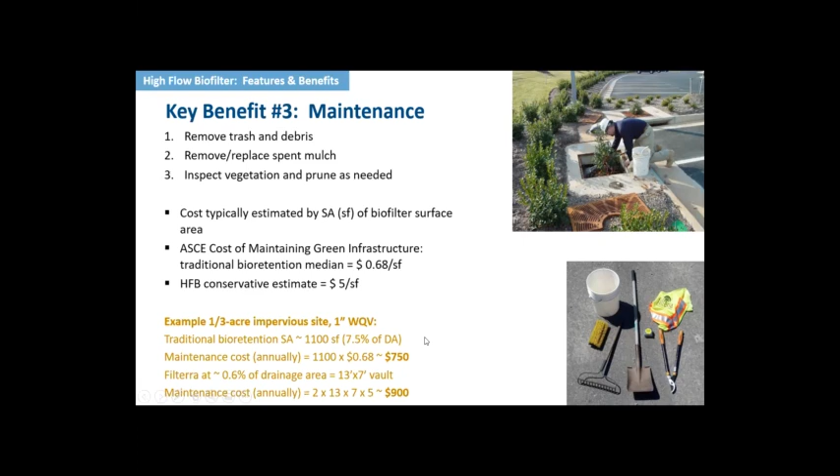So really, when you compare high flow biofilters versus traditional bioretention, some very key conclusions can be drawn. Generally speaking, they have the same components. They have a mulch layer. They have a media that's generally 2 foot, but traditional bioretention can go up to 4 feet, sometimes 5 feet, again, according to jurisdictional requirements. Typically, traditional bioretention is underdrained. With high flow biofilters, they're always underdrained effectively. And then they also have plants in both cases.

And there are some high flow filters that claim to be biofilters that do not have plants, but we would make the argument that plants are very integral and required for the physical, chemical, and biological processes that occur to accomplish the high removal rate that both systems, both the high flow biofilter and a traditional bioretention system get. But conversely, again, the dramatic difference is the flow rate, and I won't belabor that point, but that is something that is key to the design of a high flow biofilter.

The other final thing I would mention is that traditional bioretention media is made in the field, sorry about that, typically made in the field, generally by contractors. Sometimes they use qualified media from other sources. One of the differentiators on some high flow biofilters like Filterra is that the testing done on the proprietary media itself is extensive. In the case of Filterra, we do 25 different tests to make sure that the media will function, and that includes a hydraulic conductivity test or flow rate test, as well as a quick TSS check to make sure that the media will perform as required in the field.

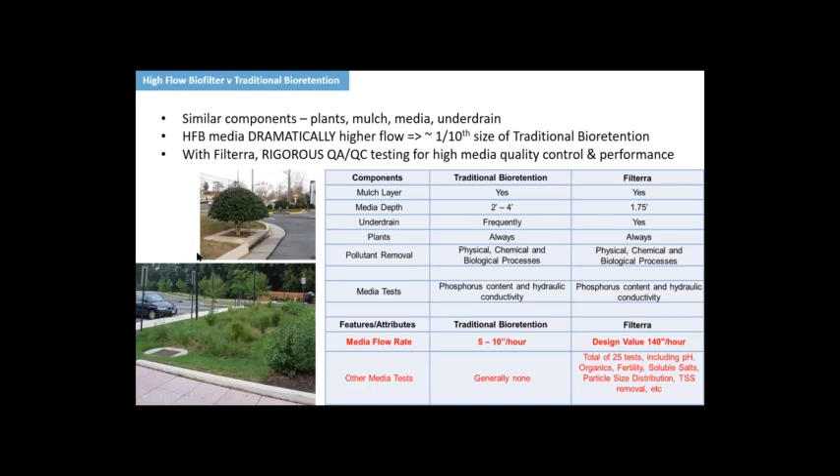The first one is, have you ever looked at using geofibers in your engineered media to artificially increase its internal friction angle to help keep your media from compacting due to water flow? That was the first question. So whoever's asking the question should send us their resume so we can consider them for our product development group. And Yuyu, unless you have any commentary, I have nothing to say relative to that.

It's a very intriguing comment in terms of what they're trying to achieve. I will make the comment that generally speaking, this is one of the reasons why it's good to have a high flow biofilter in a vault, protecting it against compaction, and that's part of the reason for a vault being a good conduit for the system. Secondly, the mulch itself is also protective of the media, keeping it from compacting too much as well. Do you have any further comments on that question? Nope, I think that's a perfectly good answer.

Do you want to cover the others, Charlene? Or the next one is, is this biofilter on the NJCAT list? So yes, absolutely. I have a slide at the very end, at the conclusion slide, but happy to comment. Filterra specifically is NJDEP certified at 80% TSS removal, and by and large, any Tennessee jurisdiction that accepts NJDEP certification thereby effectively allows Filterra for 80% TSS by default.

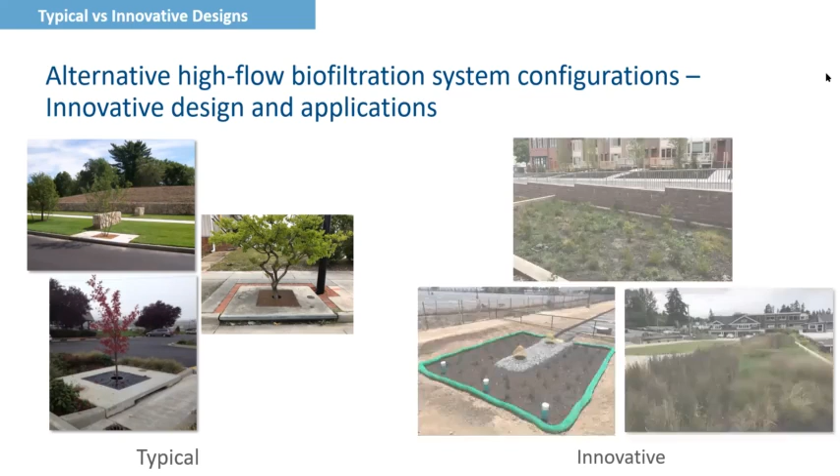From a design perspective, they're flow through systems. So anything that enters the unit itself is going to exit, as it is housed in a precast vault. But over the years, there's been advancements with high flow biofilter designs where there's a lot more flexibility with the shape, the size, and the configurations that you can see on the pictures there on the right. And you'll notice that they very much mimic a traditional bioretention system or rain garden system, as they can be designed without the vault, so what we would consider an open design.

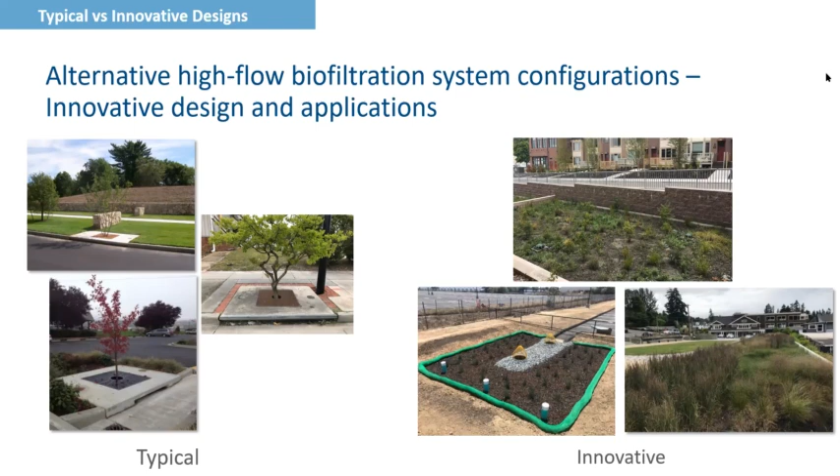And this expands the possibilities of high flow bioretention and provides more opportunity with really integrating high flow biofiltration systems to a project site. And I mentioned design with vaults or without vaults, or vault free options. Typically, if you have it in a vault, they're limited to maybe a single plant or 2 plants at best. But without the vault, you have unlimited range there. You have a multitude of plants that you can use of the same type or different types, native plants, so on and so forth. So there's a lot greater flexibility there.

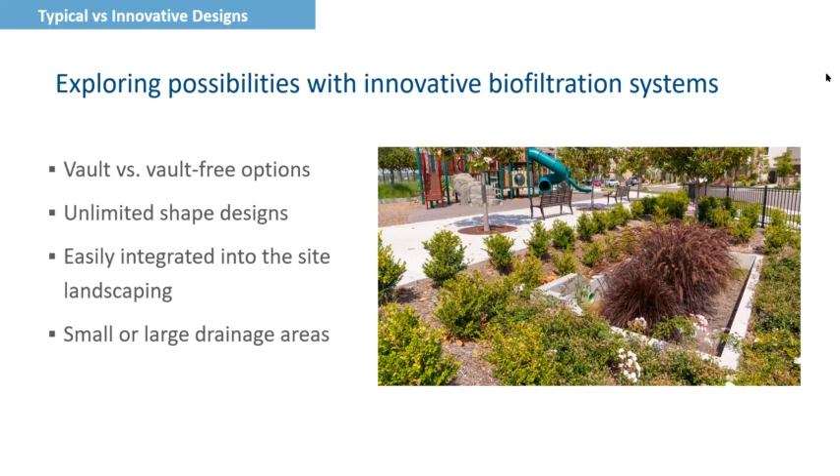And the same can be said about the shape. Obviously, with a vault, typically they're in a rectangular design or square design. With this, not being limited to 1 or 2 shapes, you can really get as creative as you'd like here. And whether it's treating a small site or a large site, it provides a more seamless transition and a connection into the landscape of the native areas of your project site. So this provides a lot more aesthetic value as well, in addition to the water quality benefits.

So really the purpose of these innovative designs has been to build on the proven track record of high flow biofilter systems in typical designs that we have had for over 25 years. And with these additional benefits that are shown on the list here, in most cases, the primary pollutant, especially here in the state of Tennessee, we look at TSS, but we can look beyond that. We can look at pollutants not just limited to that, but some of the nutrients and the metals that Glenn mentioned earlier: nitrogen, phosphorus, metals such as copper, zinc, lead, so on and so forth.

And then providing those removals at a degree that is actually above typical requirements. So for example, 80% TSS is a common number that we see across the country that is mostly implemented, but maybe with a biofiltration system, you can get 85% TSS instead of 80. So you go above and beyond what is required. So there's nothing wrong with that.

In addition, these open designs are configured so that they can provide a little flow attenuation as well as runoff reduction or infiltration, which is really the core part of low impact development. And in addition to that, the improved aesthetics with the plant flexibility, what you can choose to fit. So in many cases, you can get a landscape architect involved with the design of these engineered systems as well. So with all of the above, really looking not just from a quality perspective with typical systems, but also adding that quantity element as well. So really a total stormwater treatment package design with these innovative systems.

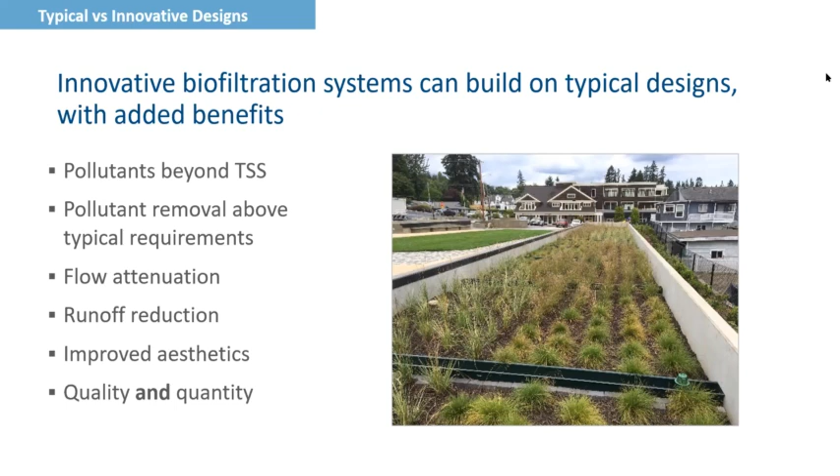So at this point I'm going to get into a couple of the case studies. So I have three. The first one here is actually in my home state in Maryland. This is called the Glenmont Forest Green Street Project. This is in Montgomery County, which is a suburb of DC. It's just north of our nation's capital here.

And this is actually part of a culmination of a countywide green streets initiative that began just a little less than a decade ago. And you'll see the image on the right. There's a bunch of areas in which these green street projects have been completed anywhere between 2012 and 2015. And you see the one circled in red, the Glenmont Forest. This is the one that is currently in design, and it has a projected completion date of 2022. So a little less than 2 years.

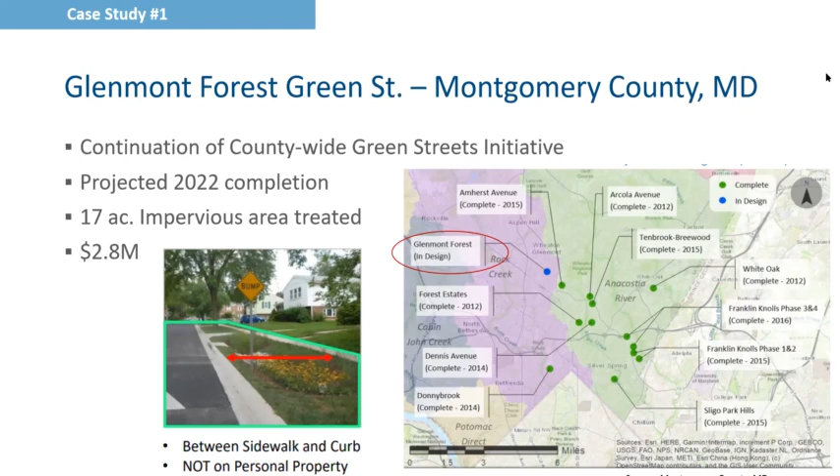And this is treating about 17 total acres of impervious area with a total project value of $2.8 million. And ultimately, the goal of these projects is to really reduce stormwater pollution. So with green streets, actually, I'm going to skip one slide and go to this first, if you excuse me on that. This is an overall map of the project. This is taken straight off of the Montgomery County website.

And this is key to note, because while this project has an overall contributing drainage area of 17 acres, this project focuses on retrofits of county-owned right-of-way, so not necessarily personal property. And this is really crucial in keeping the project within its timeline, and also additional capital economic benefits as well, in terms of the county not having to purchase any additional right-of-way to complete the project.

You'll notice that there is a whole bunch of these. There are 3 types of green infrastructure BMPs that are being utilized for this project. One being bioretention systems, another being rain gardens, and the third being a tree box, which we have been referring to as high flow biofilters. So I'm going to go back to the previous slide.

So these are actually snippets of these BMPs that have been installed in the other countywide Green Street projects. So you saw a list of maybe 10 to 15 that were already complete. These are some of the images there. So you'll notice that it's a combination, it's a hybrid approach. Each right-of-way has different design parameters. So there are fits for each of them.

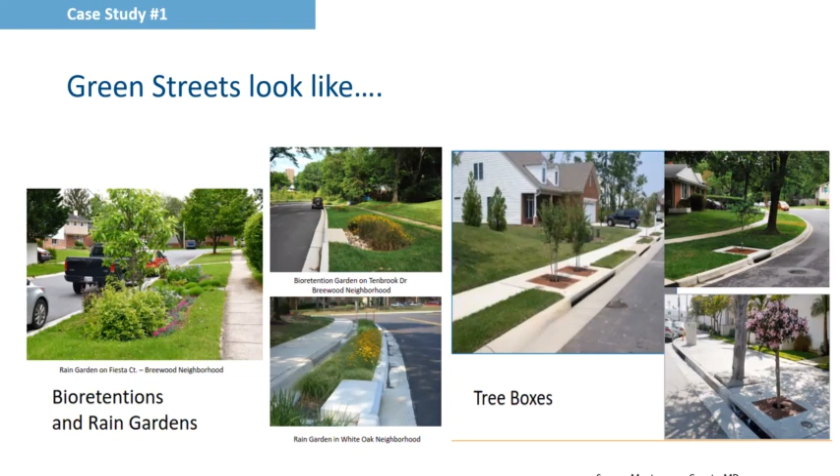So just talking about why green streets. Obviously, there is the stormwater management from a quantity and quality treatment aspect of it. But not just that benefit, but the social and educational benefit as well. So by having these green streets, you are also providing natural habitat for native plants and native animals as well, as we're really finding that communities are often looking for ways to

improve the local economy and community character, from a connectivity standpoint with the neighborhood where these BMPs are being implemented. So by installing these green streets, communities can really achieve not just water quality benefits, but that real connection, that real vibe with the neighborhood, that communal feel. They feel part of these infrastructure projects, all while promoting a healthy environmental area and creating a safe space for the residents that live in the community.

So this is the second case study. So we're going to go all the way out to the West Coast here. Glenn mentioned Washington a couple times. This is right in the Puget Sound, where it ultimately discharges to Puget Sound up in Kitsap County. This is called Whispering Firs Stormwater Park. So the image that you see on the left, this is an overall snapshot of the facility.

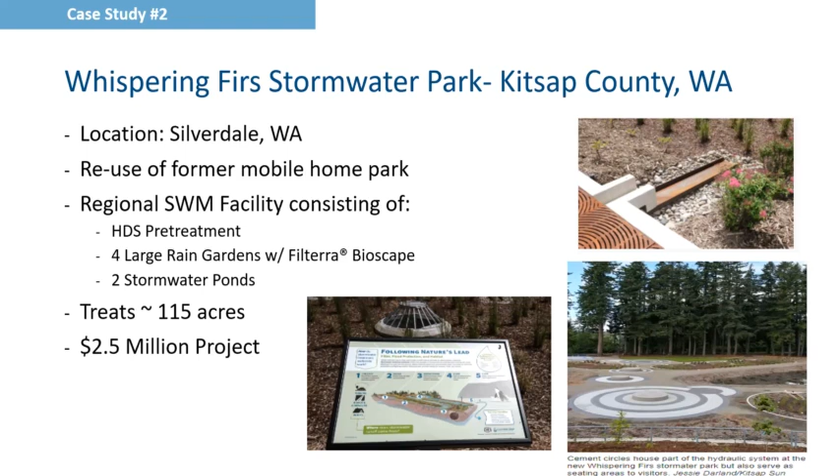This is from 2019, so this is about a year ago. So you'll see, I'm going to go back one slide, that a lot of the plants are still kind of in their infancy. So I think it'll be really interesting to see them mature and grow over time and really start to look like a very colorful and very pretty, aesthetically pleasing rain garden in the near future.

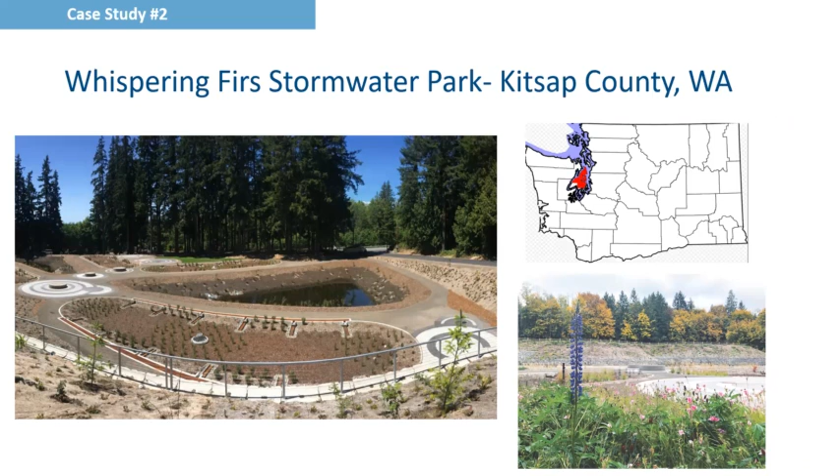This one, compared to the previous project that I highlighted, captures even more drainage area. This treats up to 756 acres of contributing drainage area. So that is a massive amount of runoff that is entering, and a massive amount of runoff that was previously untreated. So it's kind of staggering to really think about these things and think about what these potential large-scale regional stormwater facilities can really do for the community.

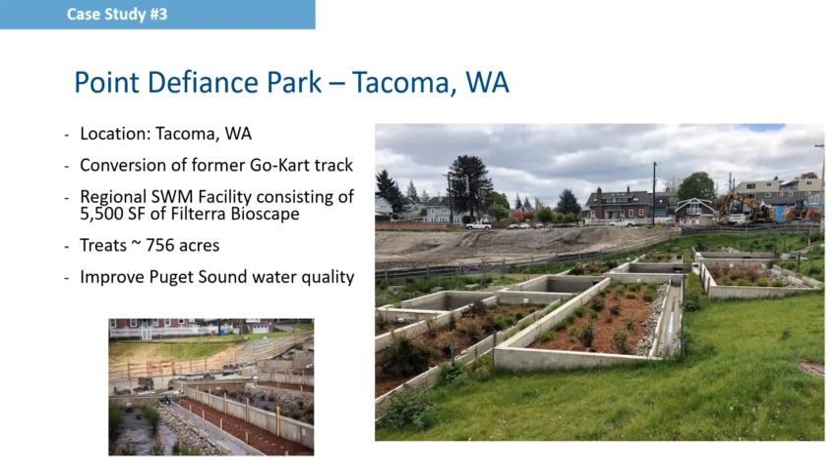And another fun fact for this one, this was actually a conversion of a former go-kart track, and there were some real steep slope issues where this project was going to be located. So what they did was just kind of mimic a waterfall, like a step down approach. So you'll see that it kind of flows in from the right side here, from all the way up to the top, and then through various diversion channels and flumes and swales and such, it kind of naturally steps down and provides treatment of the whole drainage area. There's a huge end wall that you can't see here in the picture that is the inlet into this facility. So that was a really interesting fact about this one.

And I think I'm mentioning all these case studies because traditionally we think about high flow biofilters as just, okay, let's achieve stormwater quality treatment. And I think that is first and foremost the purpose of these facilities. But by going with these innovative routes where you can capture a lot more drainage area and you can go outside the realms of just having it in a small precast vault, by implementing these large facilities, it creates a lot of opportunities as social tools, community tools, recreational environments where you're providing more awareness to the community of what stormwater management is really all about, especially in an area where they hadn't really implemented anything of the sort.

And downstream, especially in these areas, Glenn mentioned salmon, that it's a huge haven for this area. So it doesn't just contribute to, say, drinking water, which might be a thing that comes to their mind first, but stormwater management is a huge threat, is a legitimate threat to the state of Washington and the communities that surround it.

So by having these opportunities to implement these systems, I have it on a brief list here on the left-hand side, but you can have outdoor classrooms. I know that as far as the Tacoma site, some universities of the surrounding area have had outdoor classes right beside these stormwater facilities as well. So really providing a connection there is really important. And just future trail connections and job training, which leads to economical benefits as well.

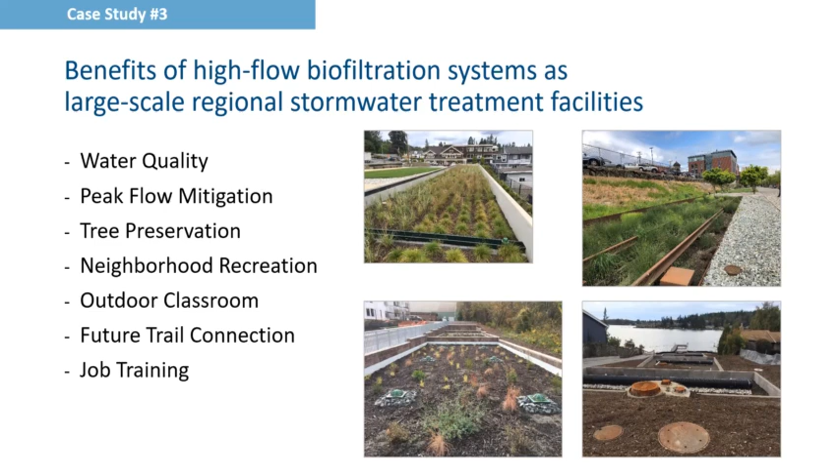So really the whole point of this presentation was to highlight the triple bottom line benefits. And this is what I try to highlight here with these various case studies. So that concludes my portion of the slides.

So I am going to. Yuyu, can I interrupt and just ask you to keep presenting, that way we don't switch. Oh, yeah. And I'll just tell you to switch slides. But thank you. So hang on there.

Yuyu, thank you for that. That was excellent, illustrating case studies. And again, another way to look at this is Yuyu had presented a nominally 100 acre site as a large watershed that was being treated or, more importantly, managed for stormwater. And so a traditional bioretention system would be at minimum 5% of that 100 acres, which is going to be a huge amount of space, specifically 5 acres roughly.

And conversely, a high flow biofilter system would be about 1/3 of an acre. So when you talk about scale like that, you can really do something with 4.5 acres in terms of creating benefits to the community. So that's a different look at high flow biofilters that you may not have thought about before, because typically high flow biofilters are dealing with 1/3 of an acre. It's not necessarily the case that they can't be used for large drainage areas, and that's what we're trying to illustrate here.

So specifically for Tennessee, we certainly asked the question, how can we translate these to where Tennessee is going, and how it might help jurisdictions and the design community in Tennessee. And specifically, I point to TDEC's permit language that basically says they want to remove pollutants to the maximum extent practicable. In the program requirements, they state, and I'm going to read here, the permittee must implement a permanent stormwater management program focused on removing pollutants from stormwater discharges through management practices, control techniques and systems, design and engineering methods implemented to the maximum extent practicable.

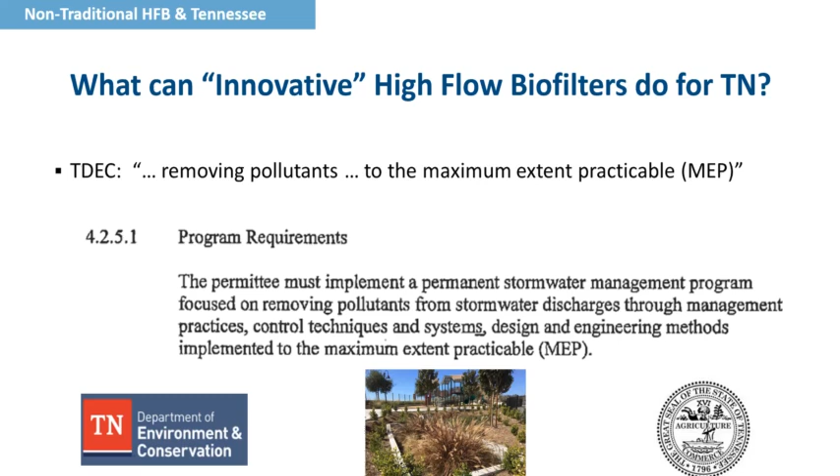Next slide. So someone did ask earlier, so this is a repeat, but specifically for Tennessee, Filterra as a high flow biofilter is approved according to NJDEP certification. We also have other approvals through very rigorous programs, including Washington DOE, the TAPE program. So we're approved at even higher than 140 inches an hour, specifically at 175 inches an hour.

So if there's a jurisdiction that would accept or consider that field testing for approval, we could work with them to establish sizing criteria at 175 inches an hour. But other key jurisdictions, City of Chattanooga, Metro Nashville, City of Knoxville, Knox County, just to pick a few, have all accepted Filterra at 80% due to NJDEP certification.

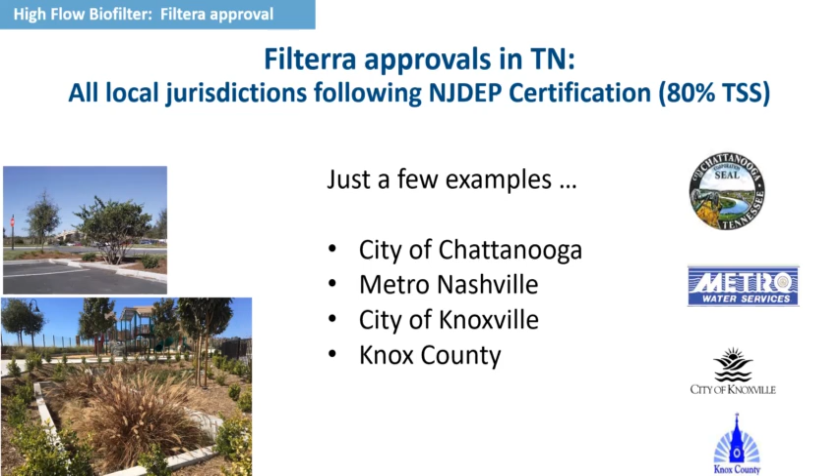And I will note that City of Chattanooga has, I didn't point it out specifically in my slide, but I had a picture. We do have two Filterra units at the O'Reilly's on East 23rd Street in Chattanooga. Yuyu, if you could advance, next slide.

So in summary, this is really kind of a recap of what Yuyu had captured and the concepts he was promoting: what do innovative high flow biofilters, innovative being open concept, large scale, different type of designs than the typical system in a box on a roadside, what do those innovative designs in high flow biofiltration do for Tennessee? Well, again, we can help contribute to the maximum extent practicable goal that TDEC is laying out.

Again, the things I mentioned: pollutant removal over and above 80% TSS, and over and above other nutrients and other pollutants. We can get rates that are very high. We can get flow attenuation specifically for channel protection, but also even for flow attenuation for maximum design storms.

And certainly runoff reduction. A Filterra high flow biofilter can be placed at the terminal point of a grass swale that's designed for water quality volume capture, and that grass swale can contribute to infiltration to the extent that Mother Nature does allow that. And that would be an improvement over just purely a flow through treatment system by itself.

And then the aesthetics, as you've seen, there's some really cool designs out there, and the high flow biofilters can really be integrated into an overall urban landscape design. And again, we can get quality, but we can get quantity management in general to help support the goals that the local jurisdiction is doing, or maybe a large development like a mixed use development, things of that kind. And that kind of wraps up what we were trying to present.